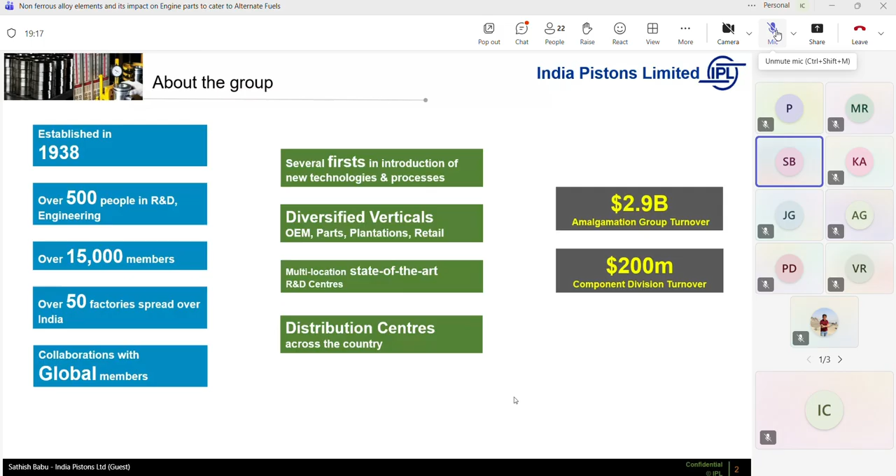So these are the companies and the history where we started. Most people may be knowing, and I will quickly go through it. Started in the 1840s with Simpson and Co. Limited. They manufacture diesel engines. And ourselves, India Pistons Limited, we manufacture engine pistons, gudgeon pins, piston rings, and liners. And we have Addison and Co. Limited, where they manufacture cutting tools and machine tool accessories.

Then later, we formed a bimetal bearing company. They manufacture thin wall bearings for the crankshaft and the conrod small end areas. We also have Amalgamations Repco Limited. They manufacture clutch parts and flywheels. We also have Shardlow India Limited. They manufacture crankshafts and forgings. And Amco Batteries for the development of lead acid batteries. And TAFE, they mainly produce tractors, and they have a lot of plants across India.

And we also have another group company, IP Rings Limited. They manufacture steel piston rings, and they have a collaboration with NPR Japan. We have two companies making piston rings, one in India Pistons Limited, and another is IP Rings, which is around 40 kilometers from North Chennai. It is at Maraimalai Nagar.

Other companies: Amalgamations Valeo Clutch, they make clutch assemblies in a JV with Valeo, and also Bimetal Bearings Limited with Daido. For automotive engine bearings, we have a collaboration with Daido Japan. And IPL Shah, a JV with Shah Development USA, which makes forging parts. And also several services and retail areas, like Higginbothams, and other plantation and corporate segments.

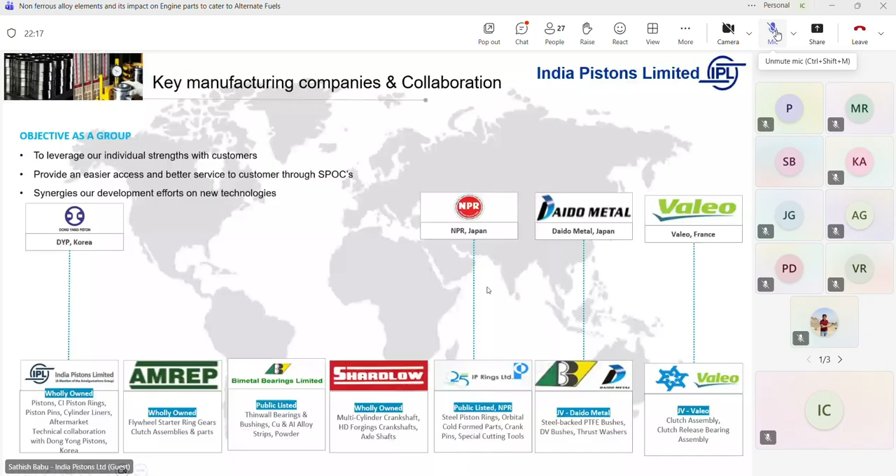So another group company is AMREP, which I told you is wholly owned, and they make flywheel and clutch assemblies and bimetal bearings. And as I told, for the IP rings we have a joint venture with NPR Japan, and for the bimetal bearings we have a collaboration with Daido Metal. We have market presence across all the segments, from tractors, gensets, two-wheelers, and also in defense, off-highways, and locomotives.

These are our main customers. We supply to Mahindra, Simpson, TAFE, Sonalika, BEML, of course Kia, Royal Enfield. So most of the customers in India. So typically, these are the piston types we manufacture inside our plant. These piston types are basically out of aluminum alloy. So we produce pistons out of aluminum alloy, supplied both for gasoline engines and diesel engines. We have various diameters ranging from 70 to 190 mm.

So we have different types of technologies in the piston in the aluminum itself. Aluminum alloy is generally a known alloy used in the piston industry for lightweight reasons, and also for higher strength to meet the customer durability targets. So we do design from scratch in India Pistons Limited with our team in R&D, and we also manufacture the parts and provide them to the customer for validation and testing, and roll it out to production.

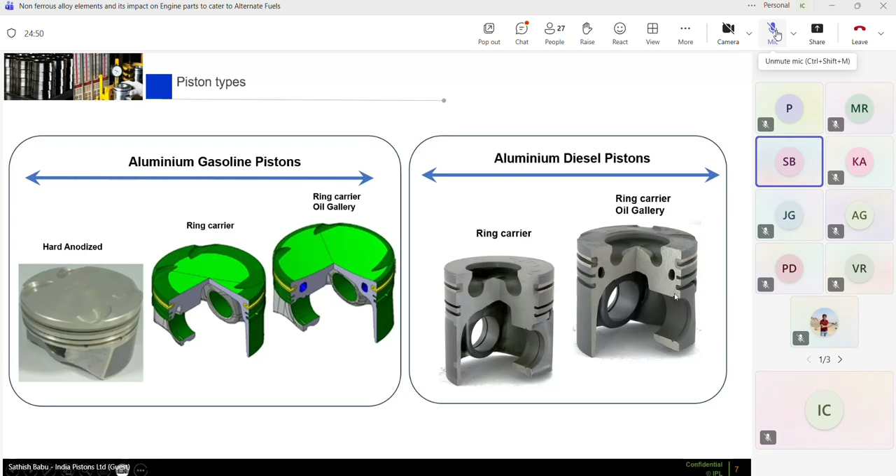So with all types of pressures coming from all the divisions of the world and political leaders, forcing us to go for tighter emissions, because the world says that automotive vehicles produce more pollution than any other industry. So automotive segments and others have started focusing on reducing emissions, typically NOx and PM, from Euro 4, 5, 6, and now going to Euro 7 today.

So with these stringent emission norms coming in, we are looking for a lot of improvements in the material and coating in all these segments. Typically in the aluminum alloy, we were very much focused on improving the fatigue strength and corrosion resistance, with the combination of alloys, by modifying the structures and other things. We are very much focusing on the aluminum alloys and other areas.

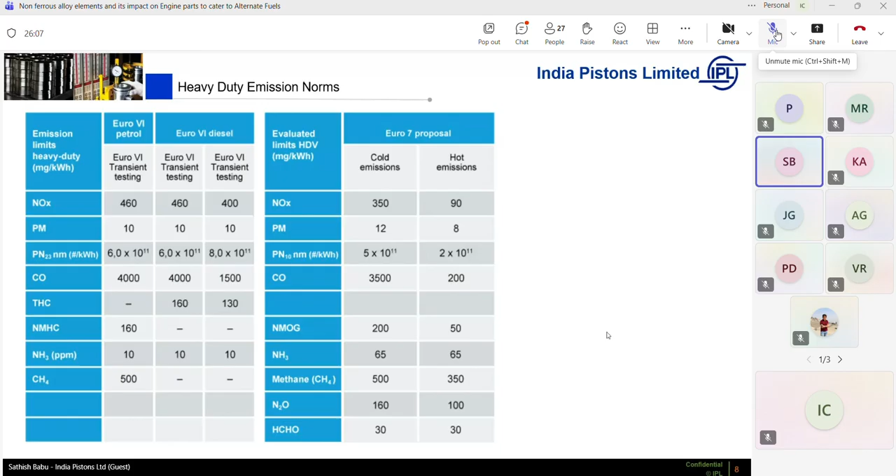Of course, more on the passenger cars and heavy duty trucks, and the agriculture norms are also becoming tighter, as it's a very typical area where farmers in the agriculture industry face a lot of problems related to emissions, because these emission smokes cannot be too lenient, as they may have an impact on the crops, which directly affects agriculture.

Today, currently in the tractor segment, we are working on TREM 3 and TREM 4 areas. The government has started focusing on TREM 5 also, whose implementation is getting delayed for another 1.5 years.

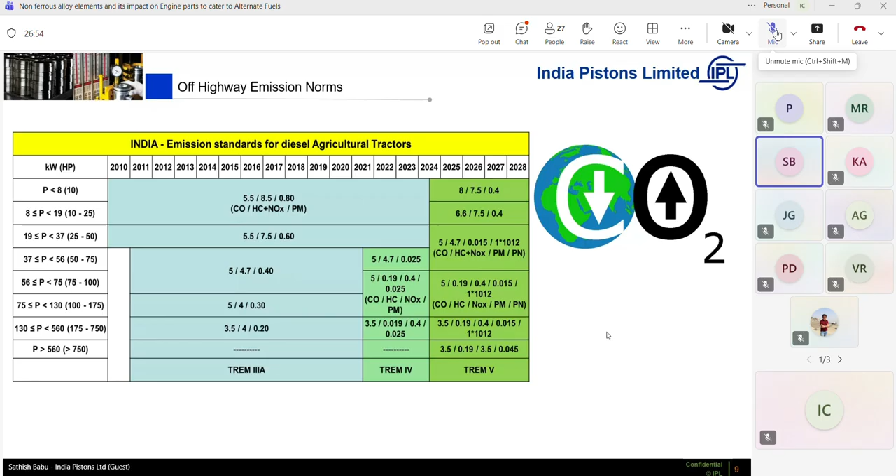So with all these emission norms focusing too much on reduction of the emissions, typically NOx, PM, CO, and PN, particulate number, the scope for improvement of norms with gas, petrol, and diesel has become very difficult. Even after adding all the after-treatments, DPF, SCR, there are still a lot of challenges to meet the emission norms, and the government has come up with the option of going with alternate fuels.

The alternate fuels go beyond gasoline and diesel. We have LPG and CNG, which are normally seen in our vehicles on day-to-day roads, and the new thing coming is LNG. Of course ethanol is also one fuel in the news. They want to introduce 20% ethanol directly into petrol, and how it is going to affect our vehicle is a big panic to us. Apart from that, methanol is another fuel which is still under research and not in production in India.

Hydrogen is the one they are focusing to introduce for IC engines, which will typically give water vapor as output, not smoke. The water will come out of the silencer. You would have seen on YouTube or in Western countries, where Toyota, Cummins, JCB and most of the customers have started introducing it. In India, most of our truck manufacturers have started showcasing hydrogen engine based vehicles, and recently a vehicle rolled out in Pune using hydrogen fuel cells.

If you see, gasoline and diesel have a lot of hydrocarbons and can emit a lot of soot, or in layman terms, black smoke coming out of the vehicle. To avoid these challenges, the carbon content is greatly reduced in compressed natural gas and also in LNG, ethanol and methanol. Hydrogen has no carbon, it's just hydrogen, and it interacts with the air and produces water vapor.

But the other challenge the engine or fuel industry sees is the energy content, that is the calorific value of the fuel. Compared to gasoline or diesel, the calorific value of LPG or CNG, and hydrogen, which I will come to later, will be a little bit higher. What it means is it releases a lot of heat inside the engine: on the piston, on the reciprocating parts, engine valves, and across the engine block.

So we need a lot of new technologies, new coolant grades, and very low viscosity oils, because the extra heat will make the oil harder over a period of time. It's basic, like you put oil in your pan in the kitchen and heat it for some time, it will become very hard. That kind of situation may come, so the industries have started focusing on very thin oil viscosity.

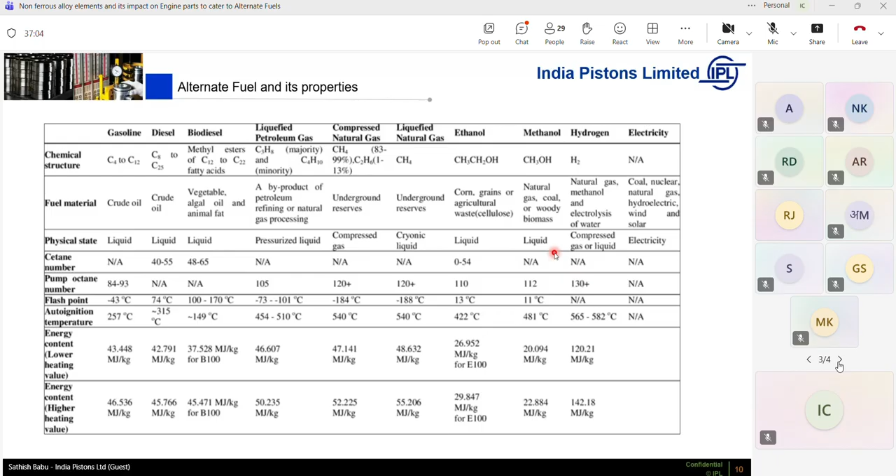Okay, as I said, these alternate fuels are very dangerous because they have lesser carbon content and more hydrogen coming in. This more hydrogen, with oxygen, and of course the air does not contain only oxygen, it has nitrogen and other gases coming inside. So it creates a lot of NOx, of course CO and other things, which create a lot of abrasive wear and adhesive wear on the parts. You can see that CNG, ethanol, LPG all have a similar kind of calorific value with a lot of heat, and the outlet will mostly be water vapor and water.

So this water and water vapor will destroy the oil viscosity, and it will make the aluminum alloy wear over a period of time. You can see the wear will not be flat. It will become like a curve-shaped structure. This kind of wear is seriously not allowed or not advisable over a period of time, or it creates a problem within a short span of time, affecting the engine performance.

In layman's terms, you need to top up your oil again and again. For example, for 1,000 kilometers you have an oil of 1 liter. And if you have this kind of abrasive wear, definitely you need to pour another 2 liters of oil, which the customer will get fed up with.

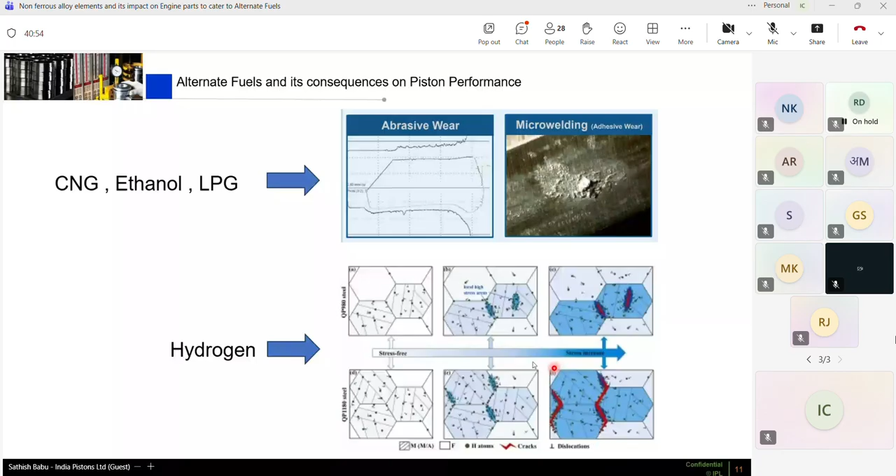So about the piston aluminum alloys, we have different grades of alloy. I did not disclose my material name here. We had a low-grade alloy in those days used in Euro 3, Euro 2 emission norms, where the engine power density did not call for high power, high torque conditions in passenger car diesel and petrol engines. In the Maruti 800 and other small engines, a very high material grade was not required.

So we started with a normal eutectic alloy, which has 11 to 13% silicon with nickel content of 0.7 to 1.3, and copper and magnesium. With these characteristics we tried to manage the upcoming emission norms, but they started asking for a lot of reduction in PM and NOx. All these things have an influence on the piston material. Silicon and copper play a major role.

And when the power density increased in the engine to meet the tighter emission norms, when the cylinder pressure and heat release rate started increasing, we went to a medium grade alloy, which asked for a copper percentage of 2.5 to 4 and a higher nickel content. We saw good improvement in wear resistance and also in fatigue strength.

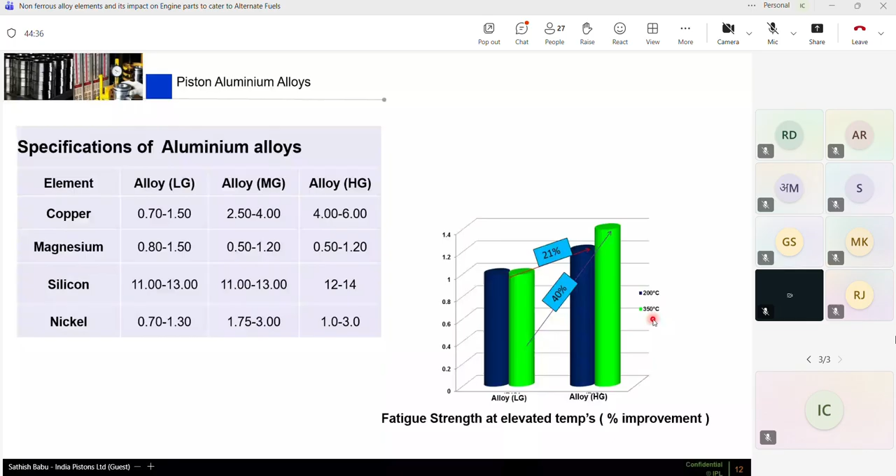It's the basic alloying elements and their properties. I'm not enough of a metallurgy expert, but I have gone through each element and its function, how it helps in reducing or improving the wear resistance, thermal expansion and fatigue strength of the material.

Of course, in aluminum alloys, we have seen different kinds of alloys used for long endurance parts, and also for high horsepower, like race car pistons. We normally use eutectic piston alloys for normal durability engines, where we want to cover 50,000 kilometers mileage, and we do not use hypereutectic alloys for these pistons, because while they have very good support in reducing thermal expansion, they are a little bit brittle in nature.

So these hypereutectic alloys are typically used in loaded conditions like smaller gensets or compressors. These are the applications where hypereutectic alloy is used, because the brittleness of the material will make the parts break over a period of time if used in high durability parts. So these kinds of alloys play a major role. These alloys can be either cast or forged.

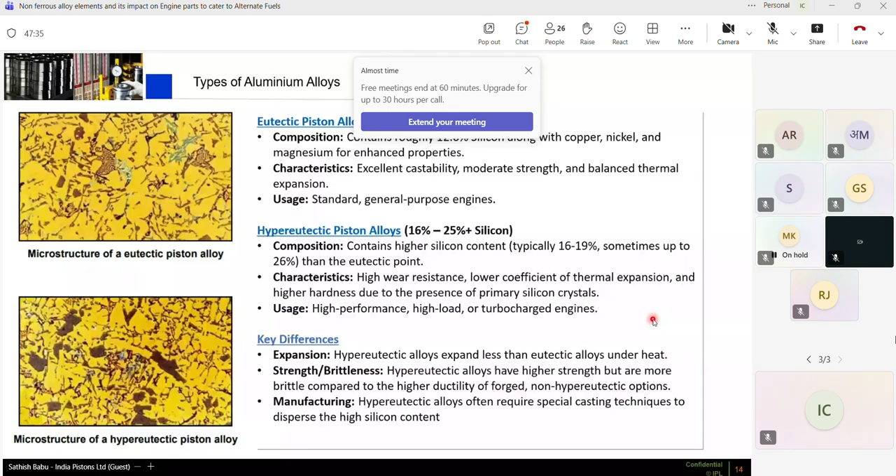So when we started focusing on hydrogen engine development, where very high heat release was happening inside, we saw a lot of technologies coming up. In our case, as I said, we also manufacture very high-end technology pistons, which reduce the temperature of the piston and maintain a good element percentage to meet the customer target. And still beyond that, a fuel like hydrogen will demolish this piston very easily, creating pitting marks and corrosion marks, and it will spoil the complete microstructure of the part.

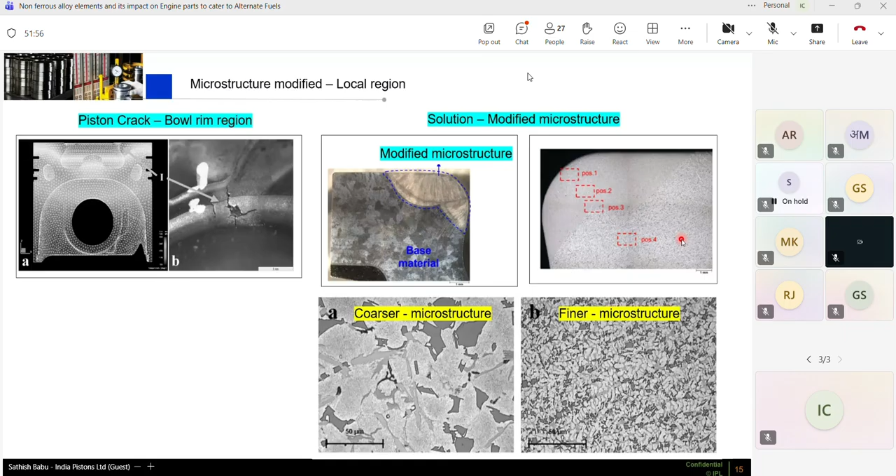Of course, the quick takeaway from this meeting: we have a lot of challenges coming in, ethanol coming in our day-to-day vehicles, CNG which we use in our daily cars, and hydrogen which may come in the future for truck applications. Of course, hydrogen fuels are used in IC engines and also in fuel cells.

So when all those things come into the picture, more than the design, the material plays a major role, and having a material with improved fatigue strength, high corrosion resistance and high wear resistance will definitely reduce the risk, meet the customer target for using these alternate fuels, and also meet the emission norms.

Of course, we also use low hydrogen. We control the hydrogen content in the casting process, and we use proper heat treatment. So we are trying to ensure that a low hydrogen content is used in the casting process, and this will be helpful to minimize the porosity levels.

Generally, piston parts produced by gravity die casting have challenges with a lot of defects that reduce the strength of the parts. We allow this kind of defects in traditional, conventional diesel and petrol engines, but we do not expect such defects in hydrogen engines, where they are very severe in terms of piston breakage. So we are trying to reduce the porosity level in the casting and enhance the strength of the part.

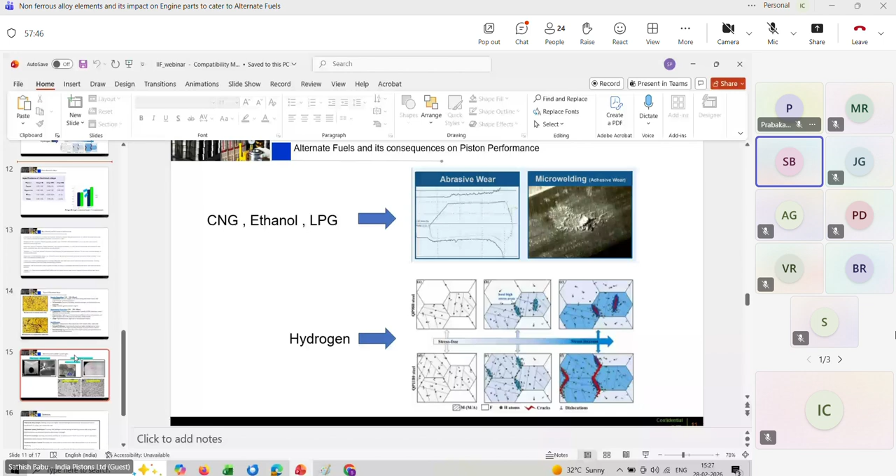Similarly, the bowl rim that you are doing, do you do any test after the casting is done, after the machining is done on the bowl rim? See, after machining is done on the bowl rim, to ensure the strength of the part, it is typically checked only in engine testing. So engine testing is the final location. Before engine testing, we have similar testing like UTS, hardness measurement, all these things come into the picture. When it is subjected to deformation and thermomechanical loading, engine testing is the right place to tell us the exact failure mode.

No, I'm asking about the bowl rim test, which you have shown in the figure, the crack that you have observed at the bowl rim and crown area, which is susceptible to a severe crack at that zone. Do you have any checking mechanism? We have a hot and cold test. We heat the piston to around 300 to 350 degrees for some time and cool it immediately after. This variation in heating and cooling will definitely find this kind of crack. So this is a basic test.

We do it before, but what customers nowadays are asking, as I said, with hydrogen going inside, hydrogen kind of testing in the rig is very difficult. So engine testing is always advisable.

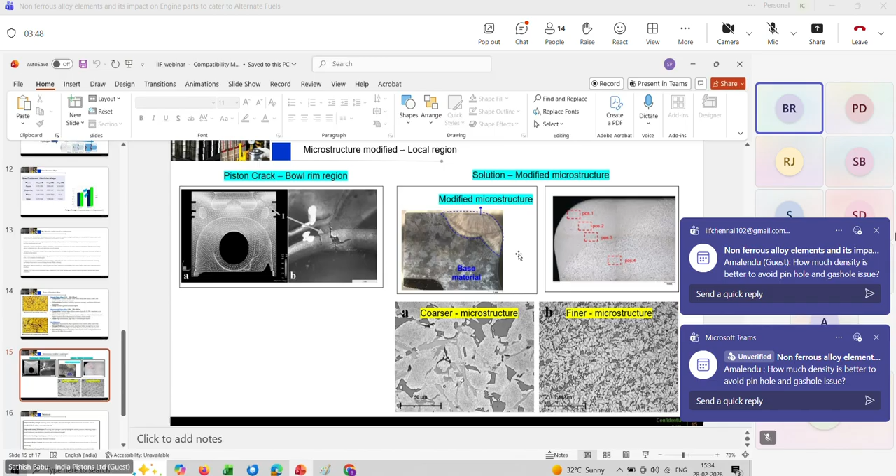Satish, this hydrogen we were talking about, is it going to be the future? Are we going to design the piston with respect to hydrogen fuel, or are we still going to continue with diesel? No, hydrogen will take some more time because the infrastructure development is less. But with respect to development of the piston material and technology, it is still under research. It will not be the same as what we see in regular diesel.

Okay. I'm sorry, I forgot to ask you about your background. Basically I'm a mechanical engineer. For the past 30 years, I've been working in various foundries, and I'm heading Minix Metallurgicals. We supply master alloys to various casting industries. So we are well versed with these master alloys and microstructural information. That is why I am asking you all these questions. Okay, thanks for asking.

And last question, because you have been a manufacturer of pistons for so many years, do we do this PoDFA testing for any of the metal that we use? It's an inclusion test, actually an oxide test. Yes, sir. There should be some tests done inside my team. Maybe I'm not able to answer your question. I'm sure that to reduce all these kinds of defects, whatever elements are added, or whatever you said should be done to improve the casting process.

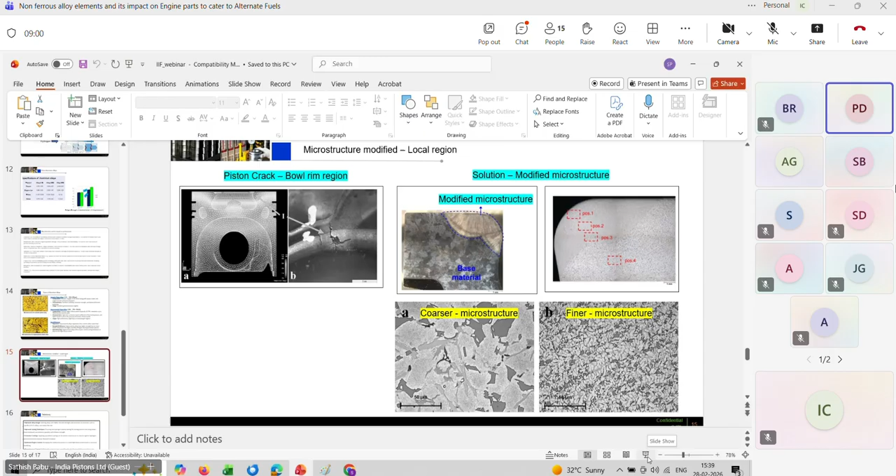I'm Pallavi Deshmukh from Minex. I have seen four alloying elements you are adding in slide number 12, that is copper, magnesium, silicon, and nickel. How are you adding these elements, in the form of a master alloy or as a pure metal? Madam, we generally get it as ingot in our case. We don't prepare the alloy. There must be master alloys, aluminum-copper, aluminum-magnesium. Is it so? Yes, master alloy is available.

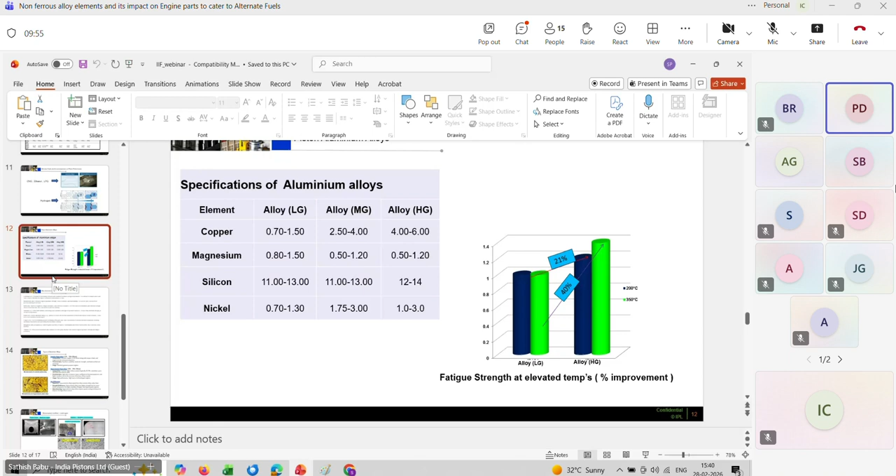There are many questions, sir. Sir, how are you achieving the silicon modification? In slide number 14. Because the silicon percent is very high, up to 13%, it should get modified, because the long brittle eutectic silicon will affect the mechanical properties of the pistons. Silicon, of course, has a major impact in reducing ductility. That is why in our regular passenger car engines we don't use these hypereutectic alloys. Yes, because you have to break the long brittle eutectic silicon phases into a small fiber structure by adding strontium. Exactly. Strontium is added to improve the mechanical properties. Ma'am, we add strontium, yes.

Hello, ma'am. I will answer your question. Basically strontium is added to modify the silicon. The Al4Sr phase which is formed completely covers the silicon and avoids the growth of the silicon. Just like in the case of SG iron, the carbon gets a globular form, in the eutectic alloy silicon is converted into a globular form, and the needle points or stress raiser points get completely eliminated by using strontium. Yes, that's the mechanism.